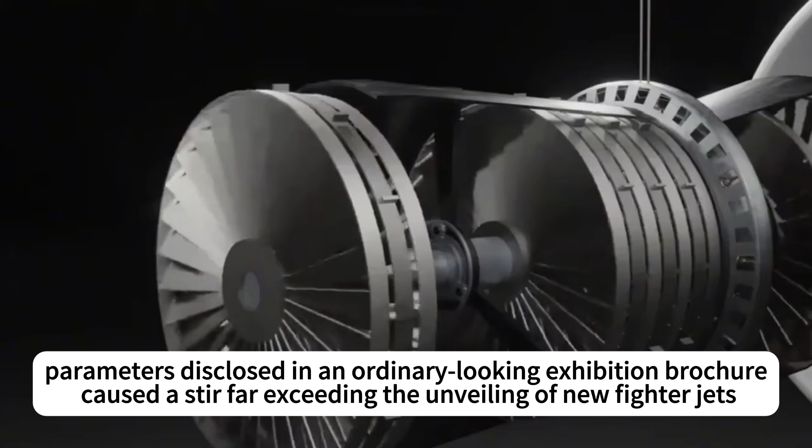As the global aviation community focused its attention on the Singapore Airshow, parameters disclosed in an ordinary-looking exhibition brochure caused a stir far exceeding the unveiling of new fighter jets. At the AVIC booth, beside the J-35 stealth fighter model, a brief description of its powerplant stated it was equipped with two WS-19 engines, each delivering 11.3 to 11.8 tons of afterburner thrust.

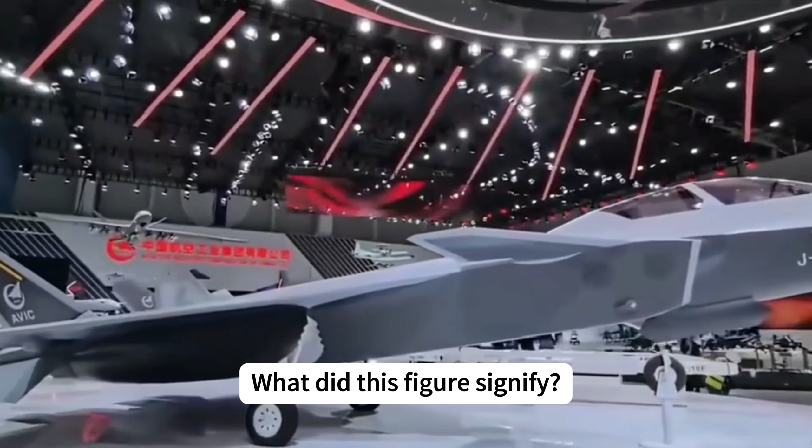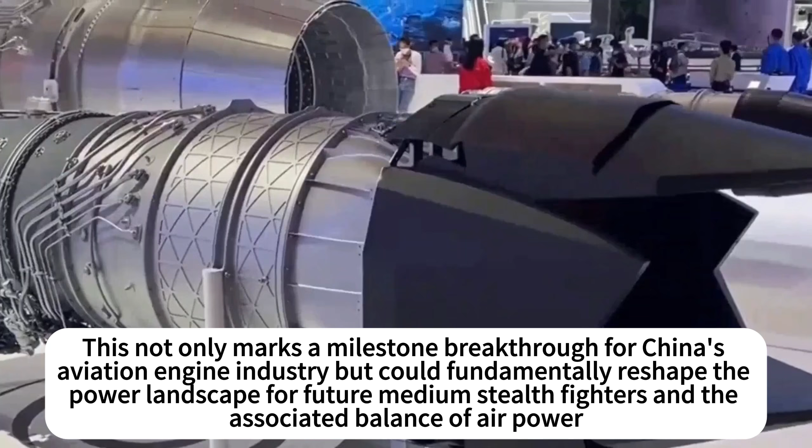What did this figure signify? It signifies that a new top-tier contender has unexpectedly entered the realm of medium-thrust engine technology, long dominated by the West. This not only marks a milestone breakthrough for China's aviation engine industry, but could fundamentally reshape the power landscape for future medium stealth fighters and the associated balance of air power.

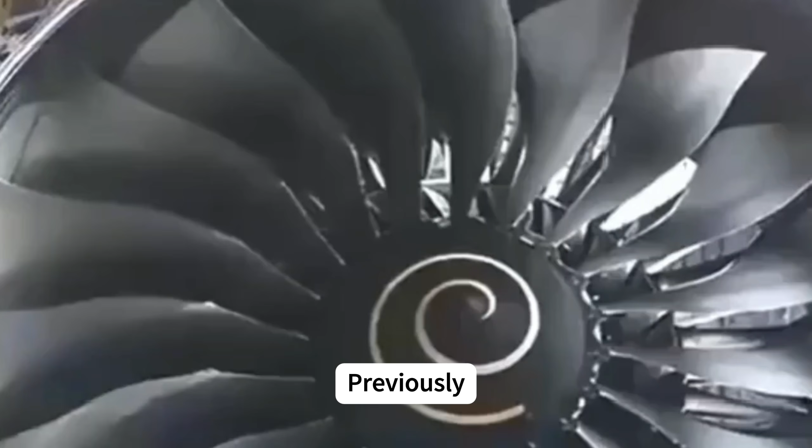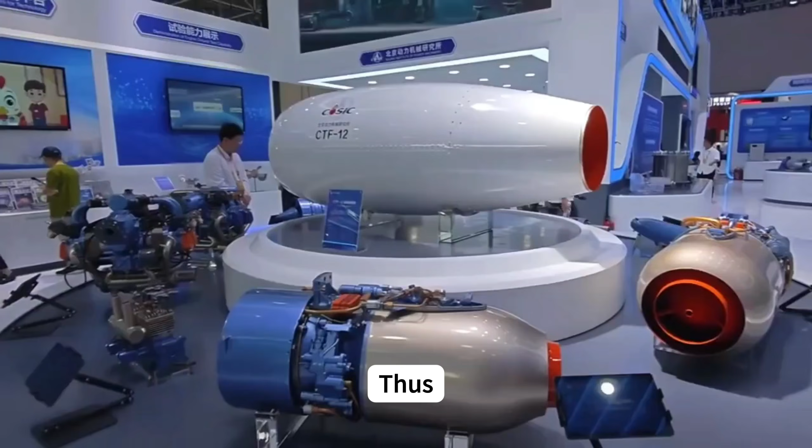Previously, based on remarks by WS-19 chief designer Huang Weina at the 2022 China Aviation Propulsion Technology Forum, industry estimates generally placed the engine's maximum thrust around 10 tons. Thus, the nearly 12-ton figure published in the Airshow journal came as a surprise to many professional analysts. This leap in thrust represents more than a simple numerical increase. It reflects intensive and substantial technological breakthroughs.

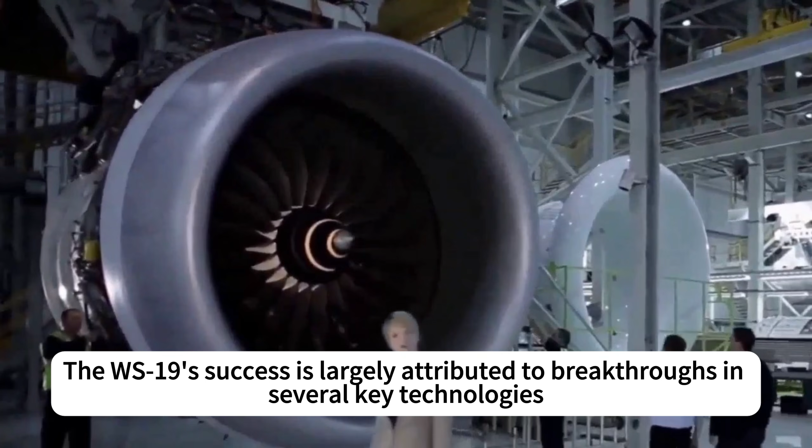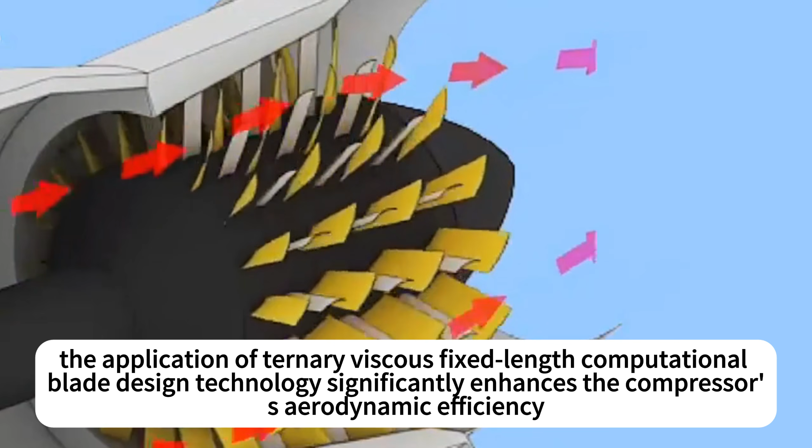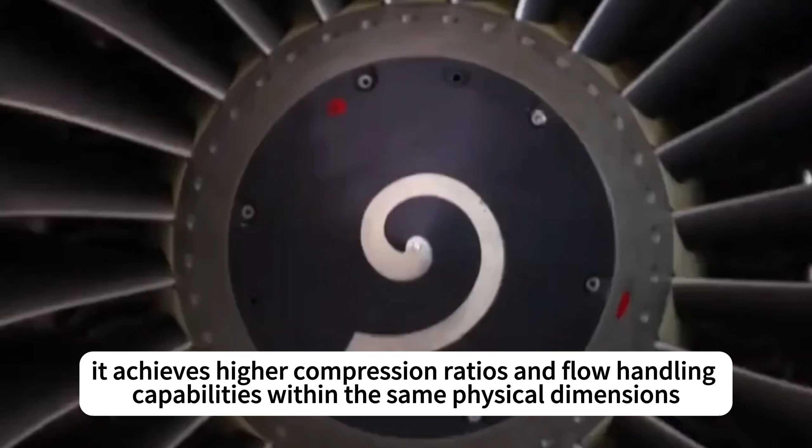The WS-19's success is largely attributed to breakthroughs in several key technologies. Among them, the application of ternary viscous fixed-length computational blade design technology significantly enhances the compressor's aerodynamic efficiency. This technology employs highly complex calculations to optimize the three-dimensional shape of the blades, minimizing flow losses within the compressor passages. Consequently, it achieves higher compression ratios and flow handling capabilities within the same physical dimensions. This effectively creates a more robust and efficient heart for the engine, laying the aerodynamic foundation for generating immense thrust.

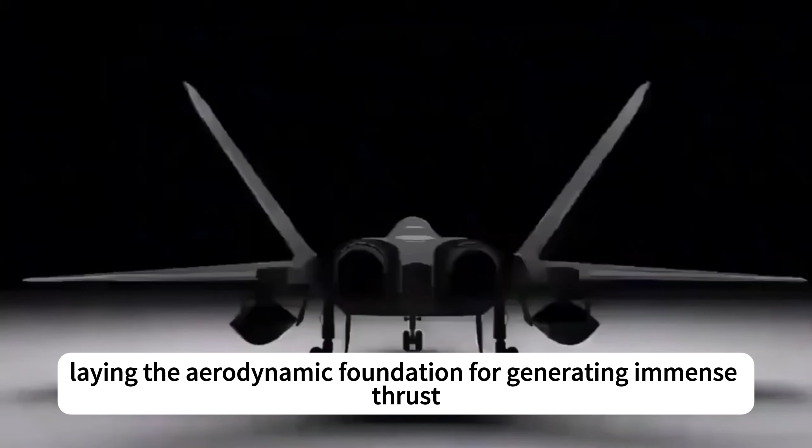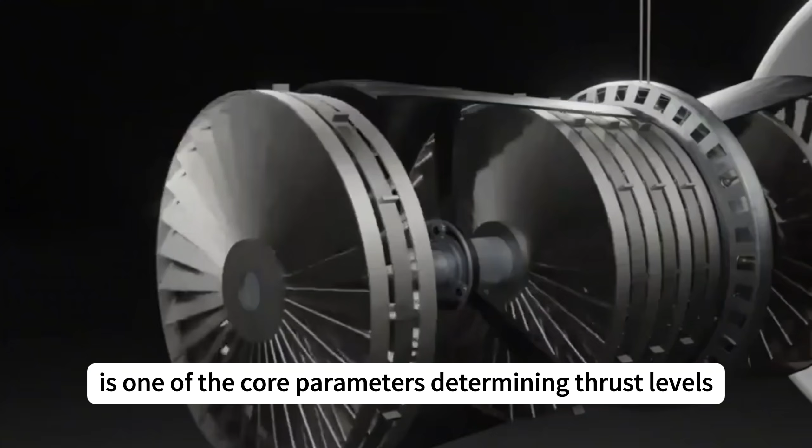However, efficient aerodynamic design alone cannot guarantee stable engine output under extreme operating conditions. The WS-19's turbine inlet temperature, the temperature of combustion gases entering the turbine, is one of the core parameters determining thrust levels. Higher TIT implies greater thermal efficiency, yet imposes near-brutal demands on turbine blade materials and cooling technology.

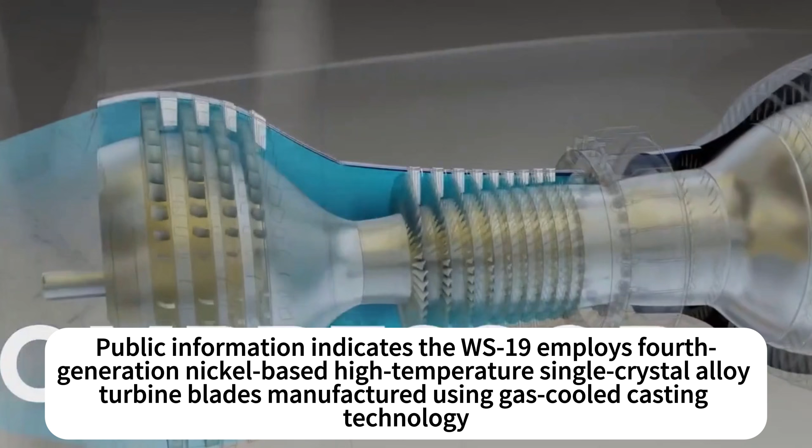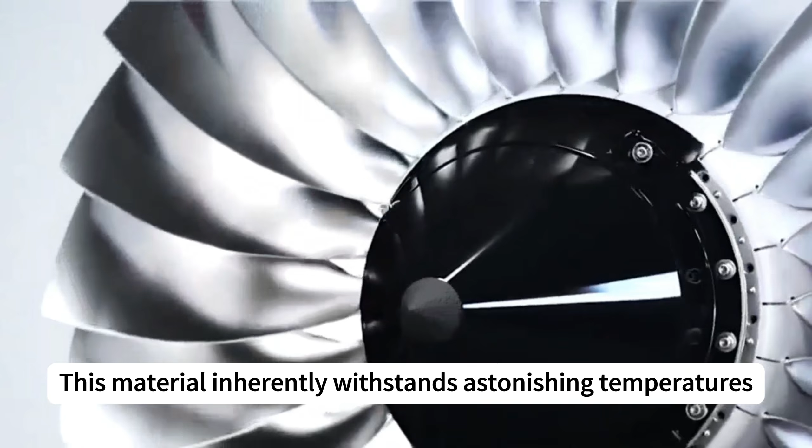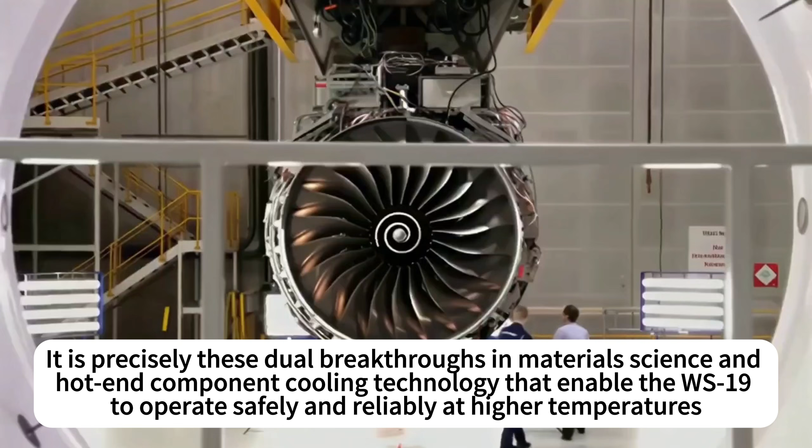Public information indicates the WS-19 employs fourth-generation nickel-based high-temperature single-crystal alloy turbine blades manufactured using gas-cooled casting technology. This material inherently withstands astonishing temperatures, complemented by meticulously designed internal cooling channels that efficiently dissipate heat from the blade surfaces. Additionally, the engine incorporates thermal management designs like fuel absorption to further optimize the entire thermal cycle system's efficiency. It is precisely these dual breakthroughs in materials science and hot-end component cooling technology that enable the WS-19 to operate safely and reliably at higher temperatures, unleashing nearly 12 tons of powerful thrust.

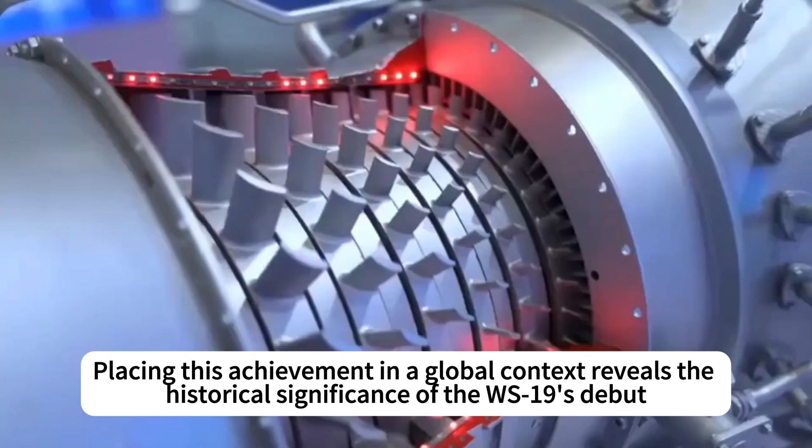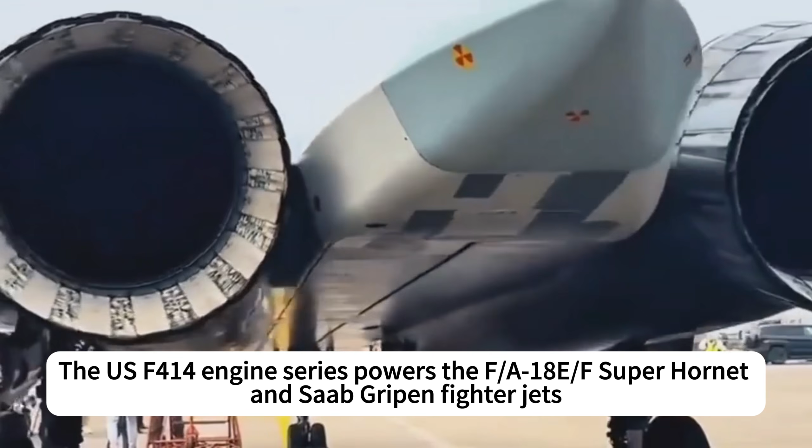Placing this achievement in a global context reveals the historical significance of the WS-19's debut. For years, the advanced medium-thrust engine market has been dominated by American and European products. The US F414 engine series powers the F/A-18E/F Super Hornet and Saab Gripen fighter jets. Its latest variant reportedly achieves a maximum thrust of nearly 12 tons with a thrust-to-weight ratio of approximately 9:1.

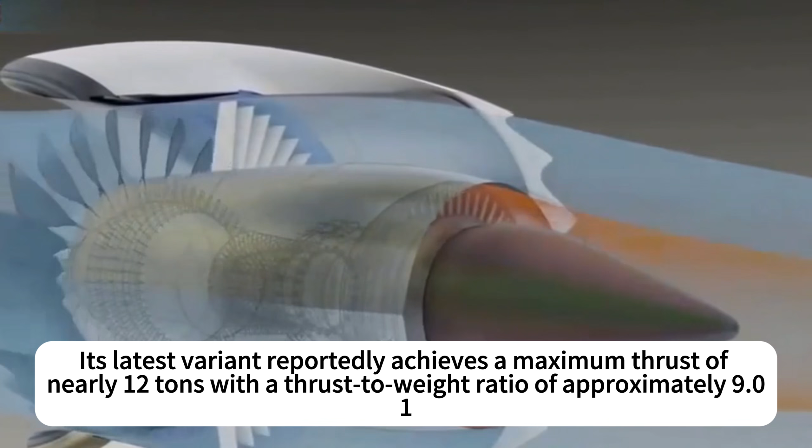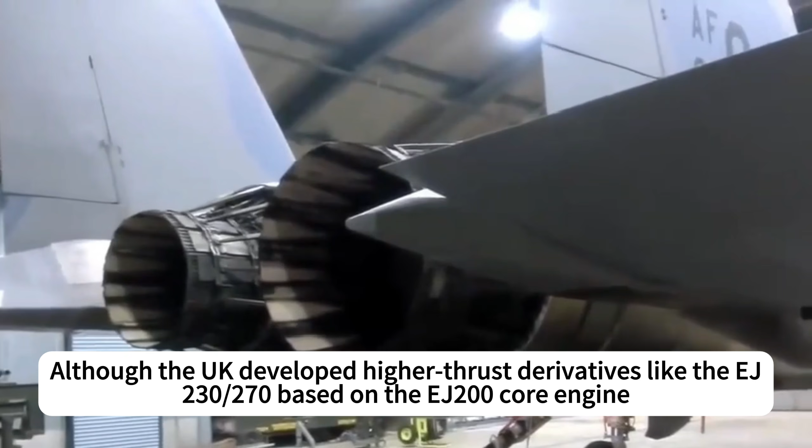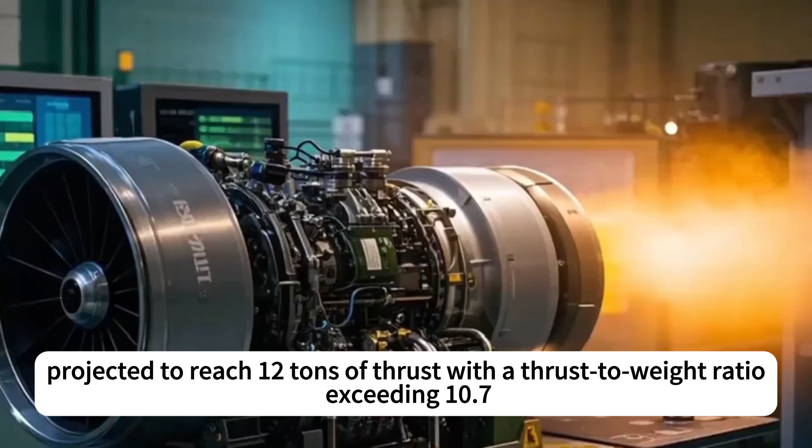Europe's EJ200 engine powers the Eurofighter Typhoon, with its base model delivering approximately 9.2 tons of thrust and a thrust-to-weight ratio of about 9.2. Although the UK developed higher thrust derivatives like the EJ230-270 based on the EJ200 core engine, projected to reach 12 tons of thrust with a thrust-to-weight ratio exceeding 10.7, progress has been slow due to the lack of a clear application program.

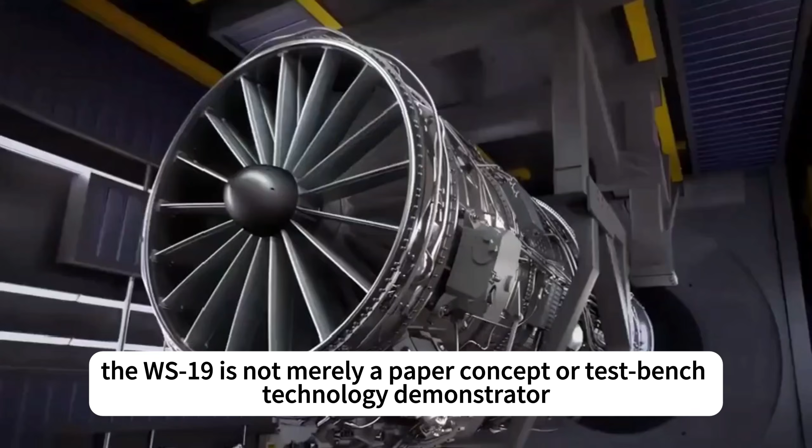In contrast, the WS-19 propels itself into the top tier, alongside the latest F414 variants and deeply upgraded EJ200 models, boasting thrust approaching 12 tons and a thrust-to-weight ratio exceeding 10. Crucially, the WS-19 is not merely a paper concept or test bench technology demonstrator. It is an operational engine developed concurrently with the J-35 series stealth fighter and poised for mass production, endowing its technological breakthroughs with immediate and tangible strategic value. For the J-35 series fighter, the maturation and deployment of the WS-19 engine represent a complete transformation.

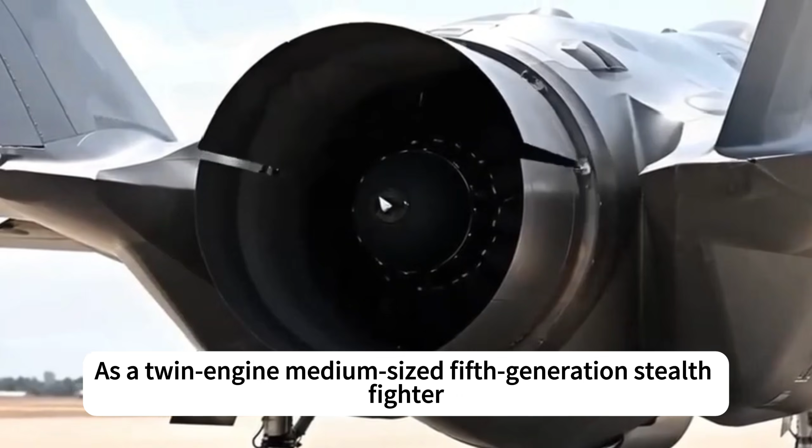As a twin-engine medium-sized fifth-generation stealth fighter, the J-35's performance ceiling is largely constrained by its powerplant. The twin WS-19 engines deliver a combined maximum thrust exceeding 22 metric tons, significantly enhancing the aircraft's thrust-to-weight ratio and delivering comprehensive performance gains. Specifically, this improved ratio translates to shorter takeoff roll distances, faster climb rates and acceleration capabilities, enhanced sustained maneuverability, and the potential for sustained supersonic cruise without relying on afterburners.

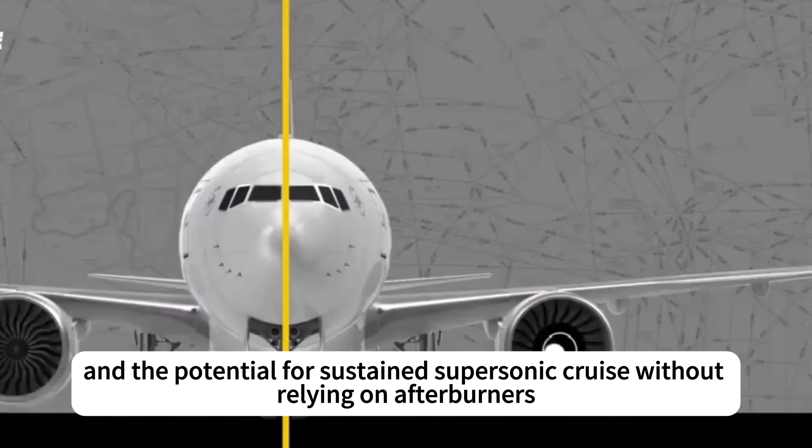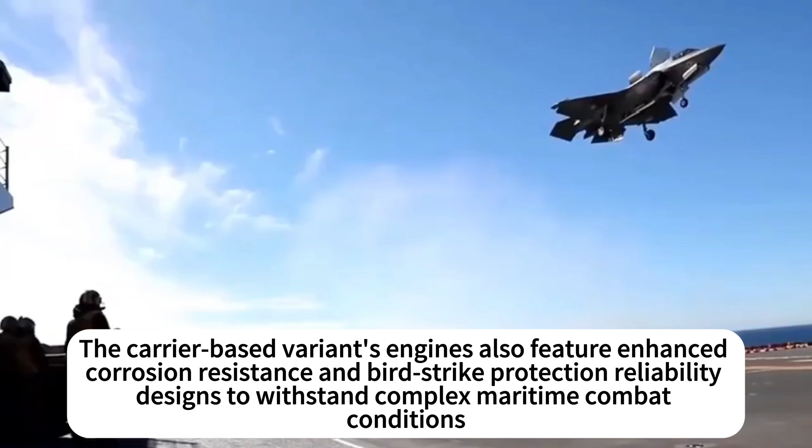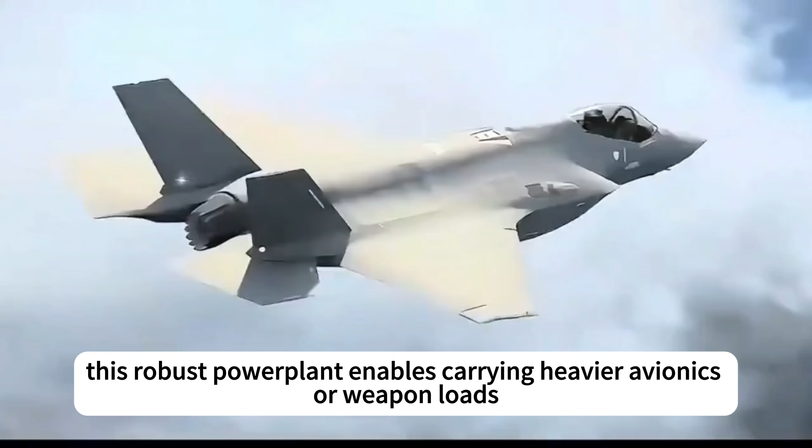Within the demanding carrier operations environment, this power advantage translates into greater takeoff weight margins and safer recovery capabilities. The carrier-based variant's engines also feature enhanced corrosion resistance and bird strike protection reliability designs to withstand complex maritime combat conditions. For the land-based J-35A variant, this robust powerplant enables carrying heavier avionics or weapon loads, extending its air superiority and ground attack missions over greater distances.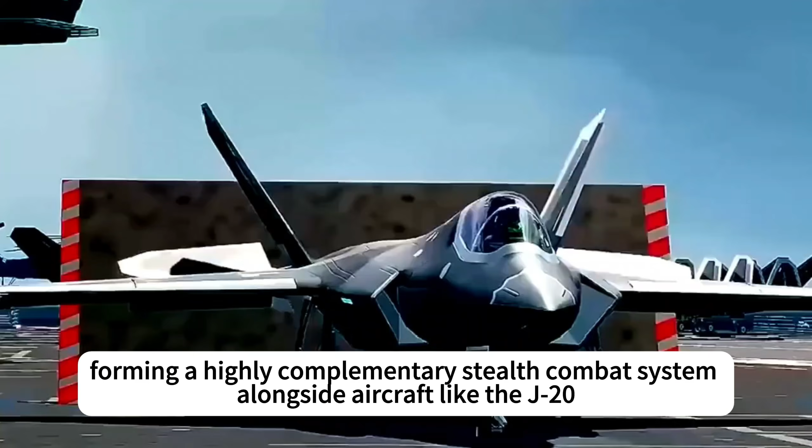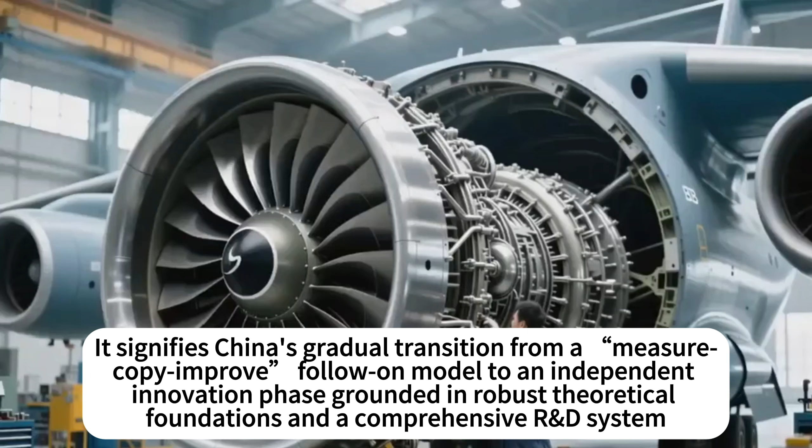It effectively bridges the capability gap between existing heavy and light fighters, forming a highly complementary stealth combat system alongside aircraft like the J-20. From a broader perspective, the successful breakthrough of the WS-19 represents the culmination of decades of sustained investment and accumulation within China's aviation engine industry. It signifies China's gradual transition from a measure, copy, improve, follow-on model to an independent innovation phase grounded in robust theoretical foundations and a comprehensive R&D system.

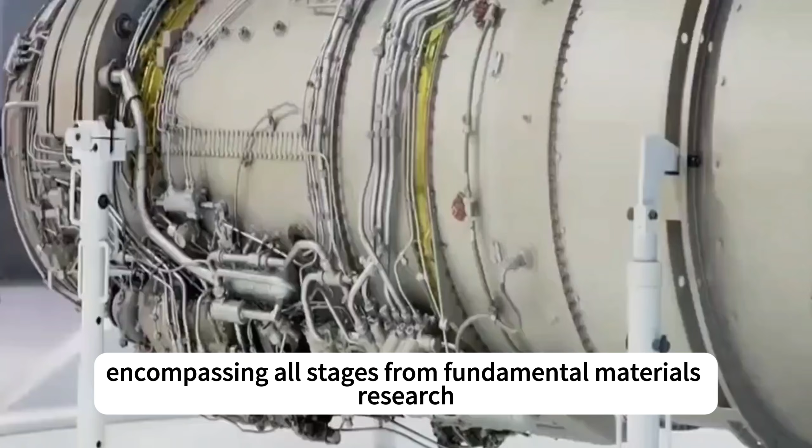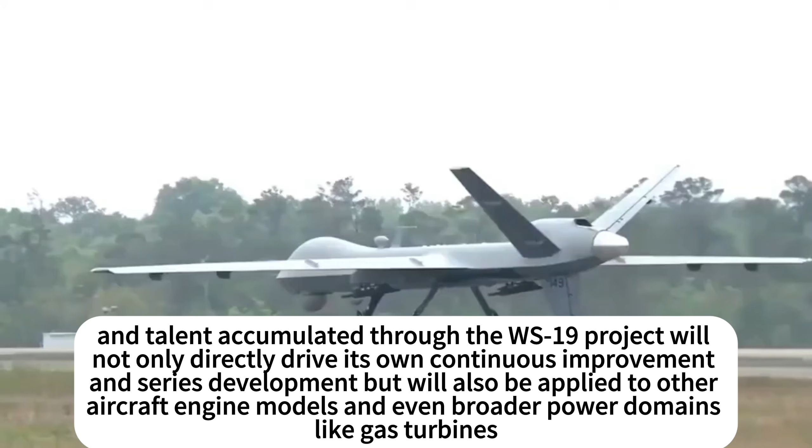This capability development is systemic, encompassing all stages from fundamental materials research, precision machining processes, advanced aerodynamic design, digital simulation testing, to complete engine integration and validation. The technology, experience, and talent accumulated through the WS-19 project will not only directly drive its own continuous improvement and series development, but will also be applied to other aircraft engine models, and even broader power domains like gas turbines, creating a virtuous cycle of technological diffusion.

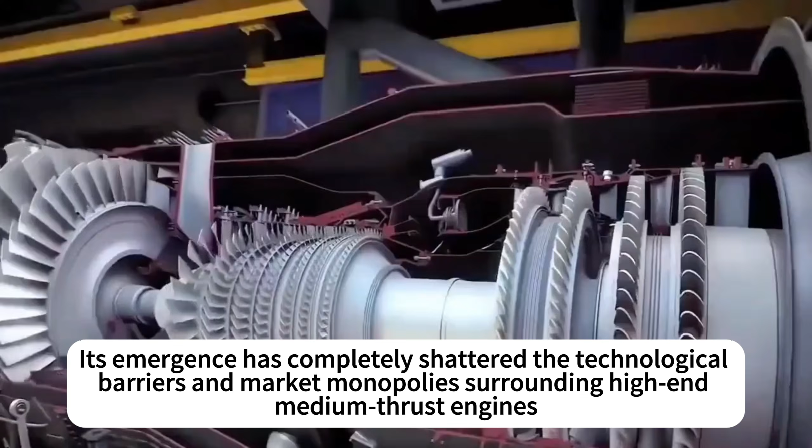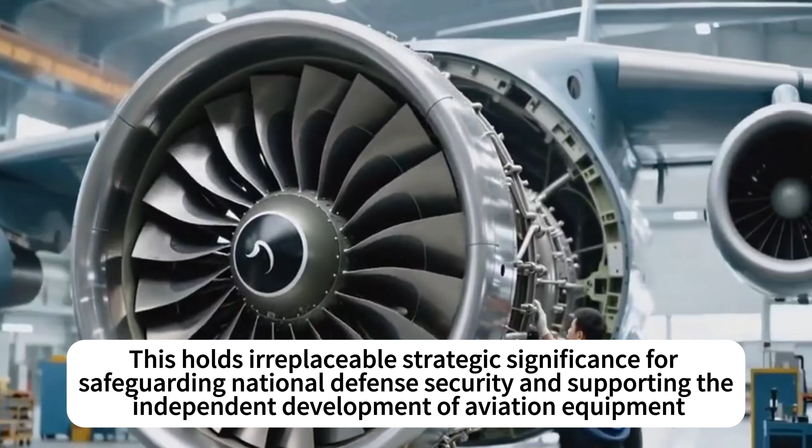Its emergence has completely shattered the technological barriers and market monopolies surrounding high-end medium thrust engines, enabling China to achieve a higher degree of self-reliance and control over critical subsystems in defense equipment. This holds irreplaceable strategic significance for safeguarding national defense security and supporting the independent development of aviation equipment. Looking ahead, the WS-19's deployment and application mark merely a new starting point.

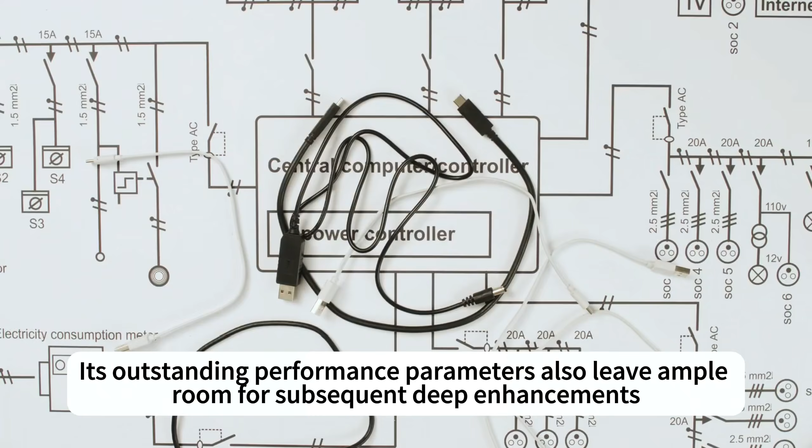With the engine's mass production and delivery, the production capacity and service entry pace of the J-35 fighter are expected to receive robust support. Its outstanding performance parameters also leave ample room for subsequent deep enhancements. For instance, through further optimization of control logic, application of more heat-resistant materials, or introduction of adaptive cycle technologies, its thrust and fuel efficiency still hold potential for improvement.

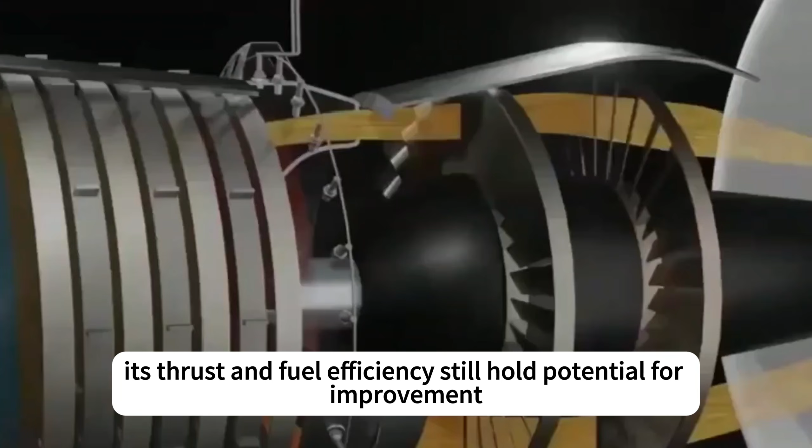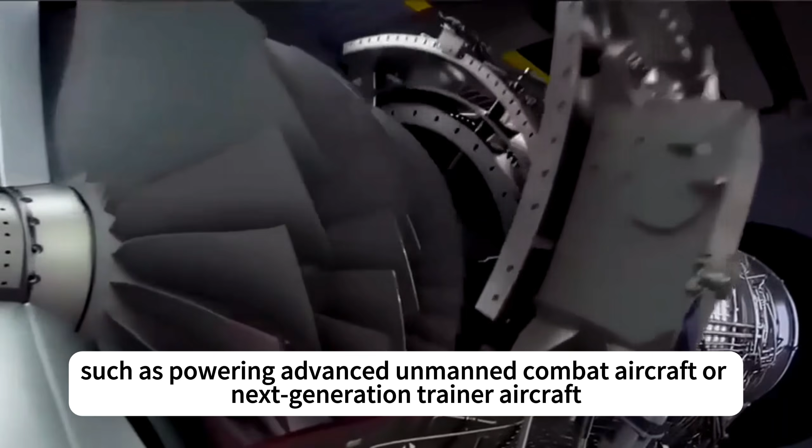Moreover, the core engine technology of the WS-19 is likely to serve as the foundation for developing derivative engines for other applications, such as powering advanced unmanned combat aircraft or next-generation trainer aircraft. On the international market, an advanced medium-thrust engine that achieves world-class performance without any external usage restrictions will also open new horizons for China's aviation equipment exports, offering friendly nations more diverse and reliable options.

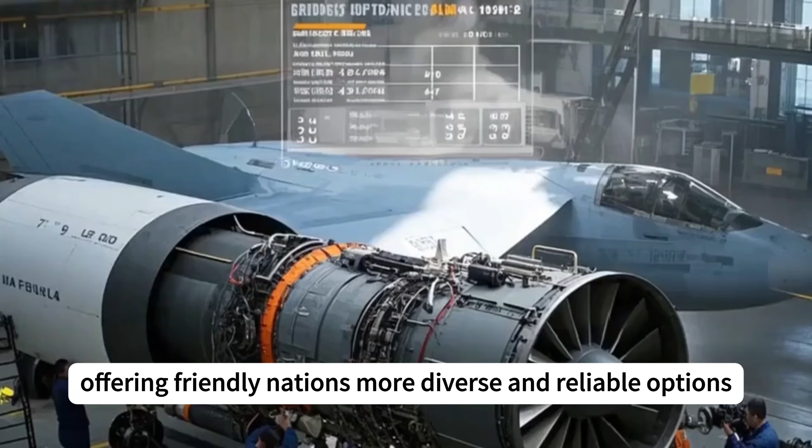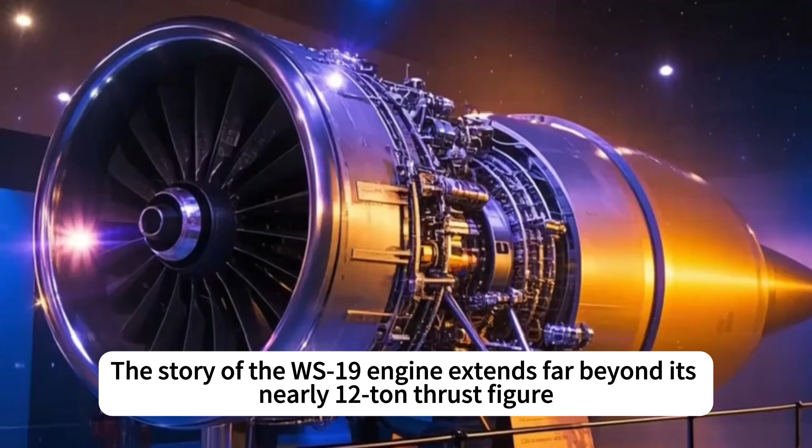That brief parameter listing at the Singapore Airshow, like a pebble tossed into a tranquil lake, has sent ripples spreading to every corner of the global aero propulsion landscape. The story of the WS-19 engine extends far beyond its nearly 12-ton thrust figure. It chronicles an industrial system overcoming formidable challenges to achieve breakthroughs, serving as a vivid microcosm of a nation's journey from catching up to keeping pace in critical core technologies.

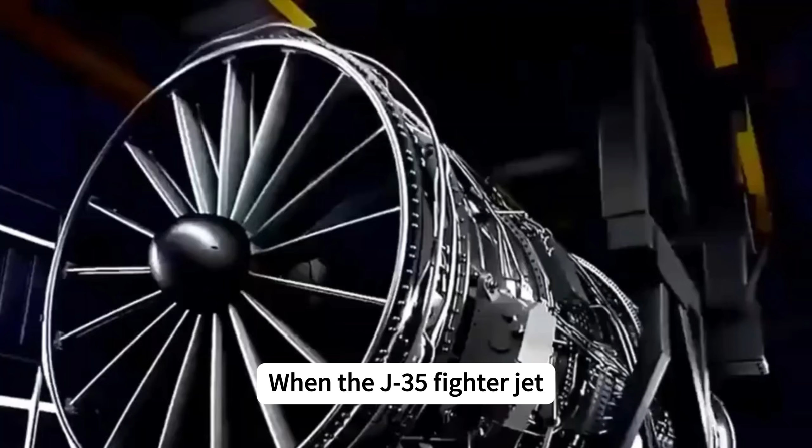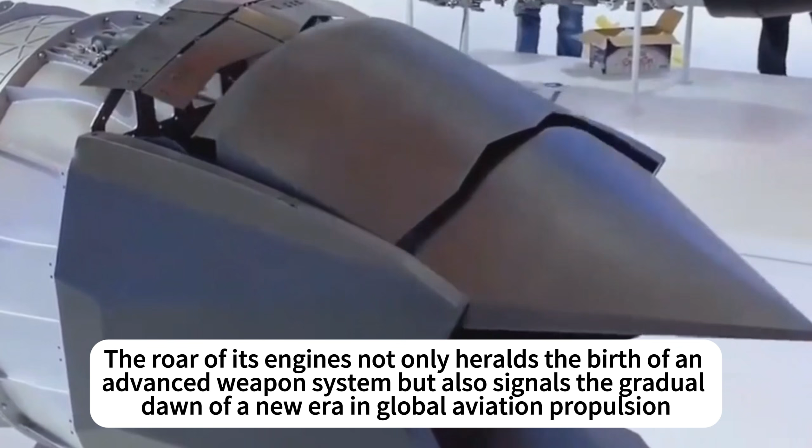When the J-35 fighter jet, powered by this formidable Chinese heart, soars through the skies in the future, it will symbolize the new heights and boundless possibilities of China's aviation industry as it enters the realm of self-reliance. The roar of its engines not only heralds the birth of an advanced weapons system, but also signals the gradual dawn of a new era in global aviation propulsion.